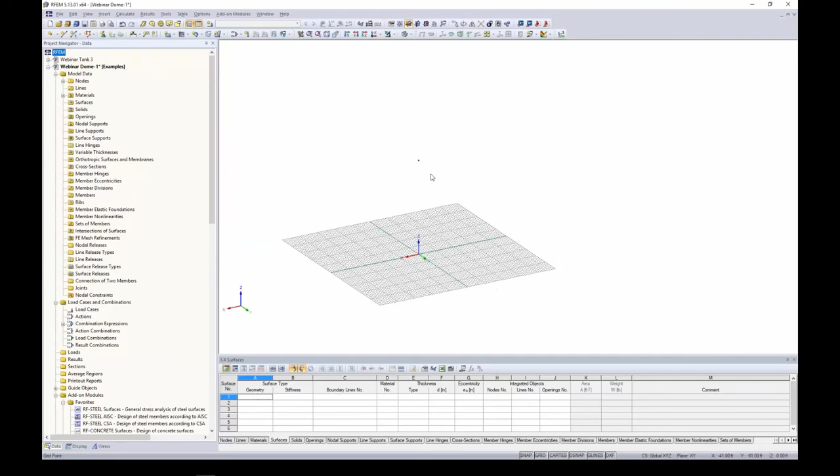So I'm going to move on to a line element. Now a line element is exactly what you would think it'd be, something similar to what you would use in AutoCAD. In addition to a straight line, we have many other features here that are similar to AutoCAD, such as circles, ellipses, polylines, arcs. For today we're going to utilize this option in arc where we define our radius.

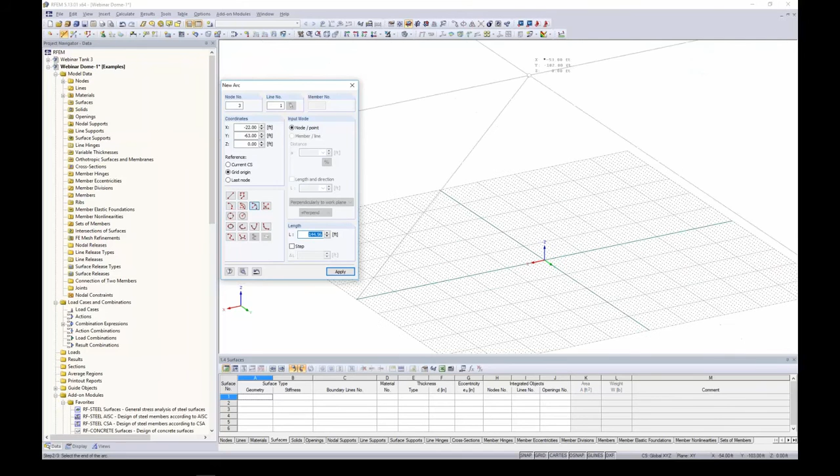So with this, I'm going to zoom in here, and I'm going to click on my first point 50 feet away from the origin and snap to that second node that we just created. So now you can see here that I can go ahead and either snap to a point to define the radius of my arc, or just type in 50 feet, hit enter, and now we have that arc element created.

I'm going to select this arc, and I'm going to use my rotate copy tool. I'm going to create 4 copies here with an angle of 90 degrees. Now we're going to rotate it about the origin, nothing too special here.

But there is a setting called Edit Expanded Settings, and we have the option within this dialog box to actually create surfaces between my copy nodes. So what happens with this checked? Well, once I click OK through all of these dialog boxes, you'll notice that my dome roof was created with just a few clicks of a button.

So the dome roof right now is bright red. That usually tells you that there's something that hasn't been defined within the model. So when I highlight all of my surface elements, I double click to edit them. We want to set the material, the thickness, and the stiffness here. Right now everything's set to null.

So we're going to change this to standard. We're going to utilize one of the default materials within the program, so concrete 4000 PSI. Now you can always access your material library here to change the material or to create one yourself. The thickness of our dome walls will be 8 inches, and I click OK.

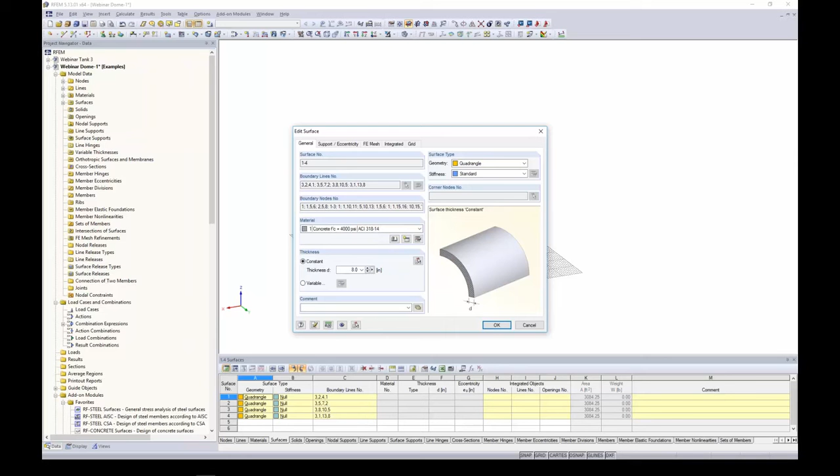So once I click out of here, you'll notice that the color is now gray, which is representative of our concrete material. So perhaps a weak point of a dome would be up here at the top, and we would want to add in some type of rib members for additional stiffness up at the top center point here.

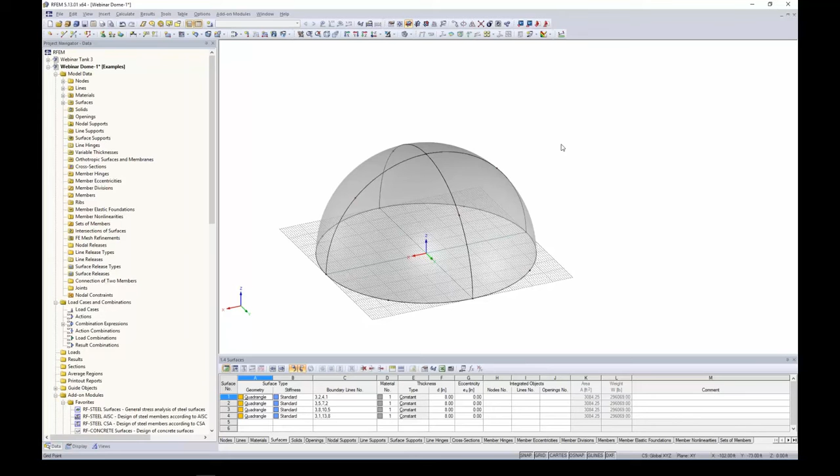So I want to show you some of the useful features and tools that we have within RFEM to quickly do this. Now I'm going to turn this into a wireframe view, turn off my grid down at the bottom, and my line elements up at the top, I'm going to use my selection box here.

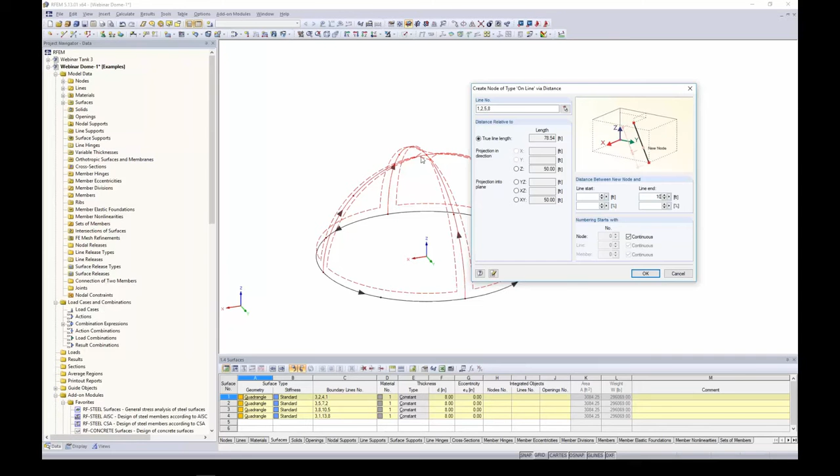I'm going to right click to edit the line. And under this option, we have create node on line at a certain distance. So with this option, I can create a node on that line 10 feet from the line end. And you'll notice these black arrows back within RFEM show me exactly where the line start and the line end is.

I click OK. So now I've done nothing more but just create little nodes here at the top of the dome. Now we're going to do the same thing at the bottom lines. I'm going to highlight all of these lines down at the bottom, right click, and under line we can create a node on the line at a certain distance, again 10 feet from the line end.

I do the same process again. This time I'm going to create the node on the line 10 feet from the line start. Okay, so all I've done here is add in these additional nodes to my structure.

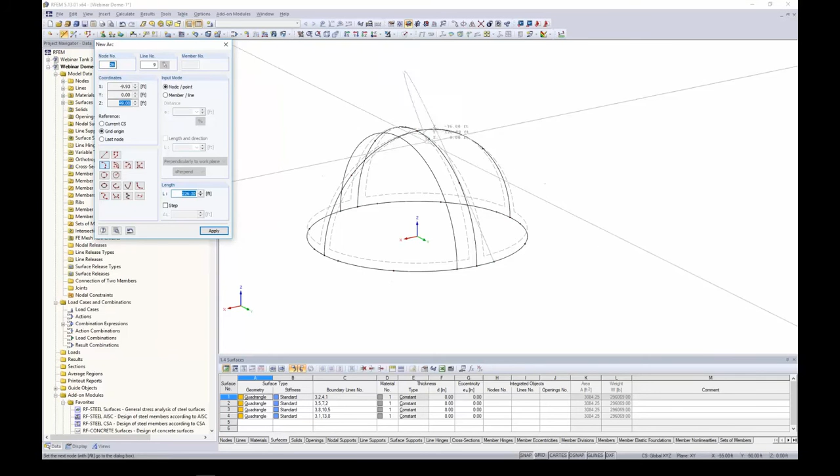Now I'm going to utilize the line element again. This time with my arc, I'm going to choose the option to define the arc with 3 nodes. Once I select this option, I can move this dialog box over and snap to these nodes that I just generated. Now you'll notice that I'm getting arc elements that match the curvature of my dome roof perfectly. There aren't any additional definitions that I need to define here in terms of the geometry, but the program will automatically do it for us.

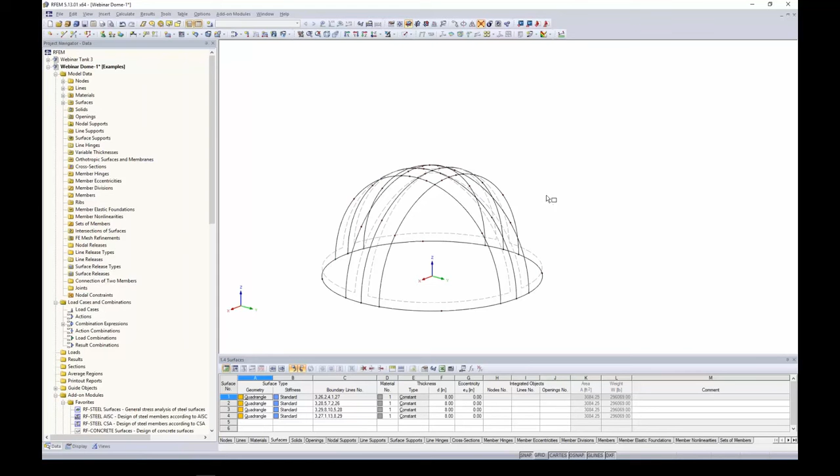Once I've done that, I'm going to use this tool at the top, Connect Lines or Members. This allows me to highlight the top of my structure, and now all lines that are intersecting will be divided. You'll notice that an additional node was created here at these intersections, so these are now separate line elements.

I'm going to select 2 of the arcs over here, 2 on the back side, and right click to reverse the line orientation. Now you'll notice when I select the other 4 arc lines that all 4 of these lines begin at the bottom of my dome structure and end at the top.

With this option, I'm going to right click and divide the line this time by a certain distance. So from the line end, I'm going to divide it at 10 feet. I click enter, and now you'll notice I have a couple smaller line segments here.

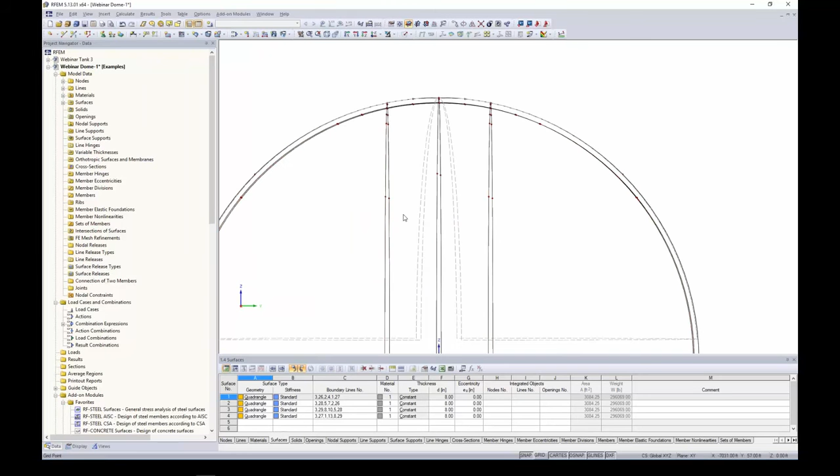Now we're ready to clean up the model a bit. So what I can do is turn this into elevation view, highlight some of these unnecessary lines, and simply hit delete on my keyboard. We're going to do so on the other side after I've rotated the structure around. So now you can see we have what will be rib members, but right now they're only lines.

Now, before assigning a cross-section to these lines, what I need to do is integrate these lines into each surface. When I take a look at the rendered view, typically RFEM will do a lot of this for us automatically, but this geometry is a little bit more complex, and we added these lines in after the fact.

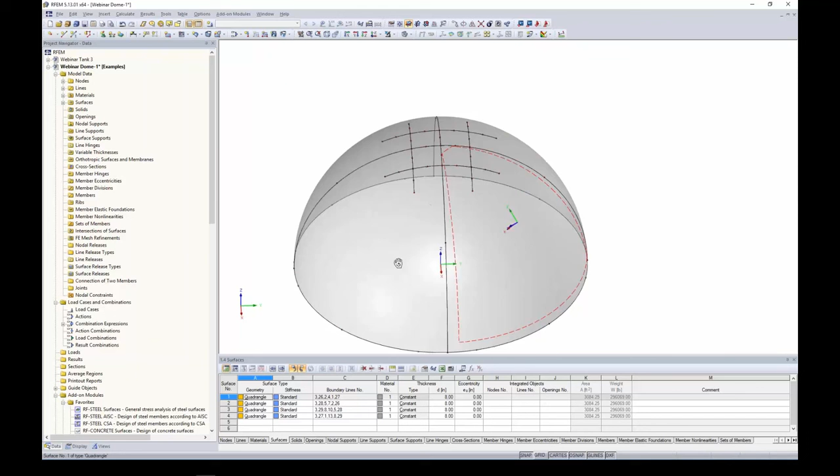So what I can do is double-click on this surface, and we have a nice tab here called Integrated. With Integrated, I can graphically select the lines, move this dialog box here, that I would like to integrate into that particular surface. I click OK, and then I'm going to rotate around and do the same thing for my second surface, select my 4 lines graphically, click OK.

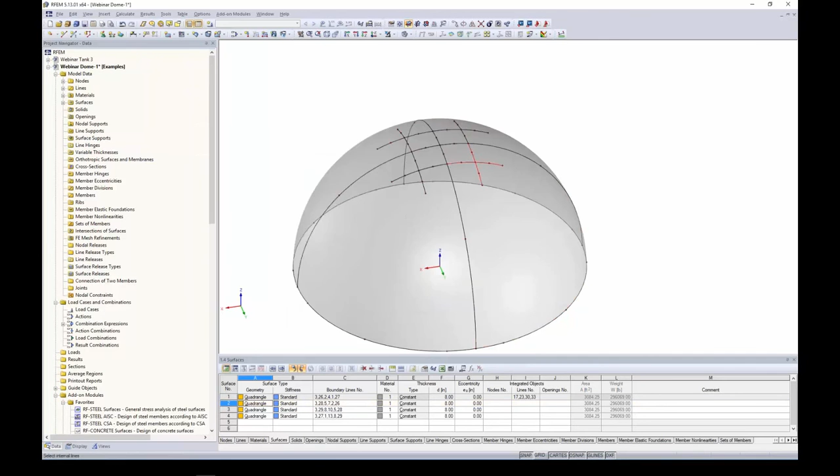We're going to do the same thing for the third surface, selecting the 4 lines, and lastly we have our 4th surface that we need to consider. Once we fully integrate these lines in here, the surface will recognize that these lines are fully part of this particular 2D element, and I click OK.

Turning this back into wireframe view, I'm going to zoom out and put this into plan view. I'm going to hold down my control key and select all of these line elements here. I'm going to go ahead and click on... oops, sorry, I lost that selection. Let's try that again. So I'm going to select these 4 line elements on each surface that we just integrated.

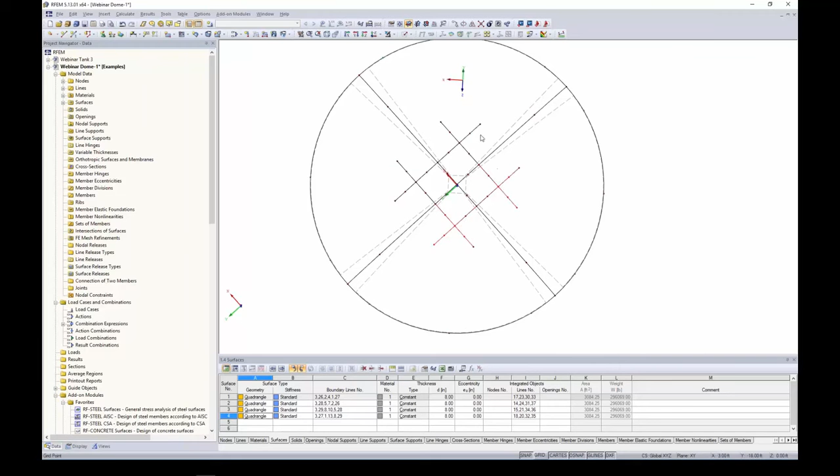And I'm going to right click on these lines to edit them. Now each member, such as a column, a beam, anything else, is comprised of a line element underneath it. All that we've done is assign a cross section to create that member for each line.

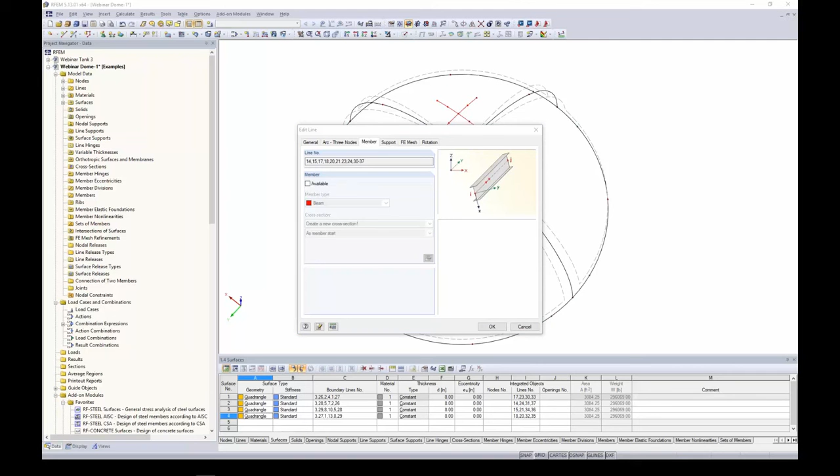So we have a member tab here. With this member tab, we can simply select that a cross section is available, and automatically a new member dialog box will pop up. Now the member type is going to be type rib. So what is so special about a rib element? Well, if I go into the detail settings here, you'll notice that a rib element can actually be placed below the surface. So the program will automatically determine which rib element should be dropped down below the thickness of that surface and do everything automatically.

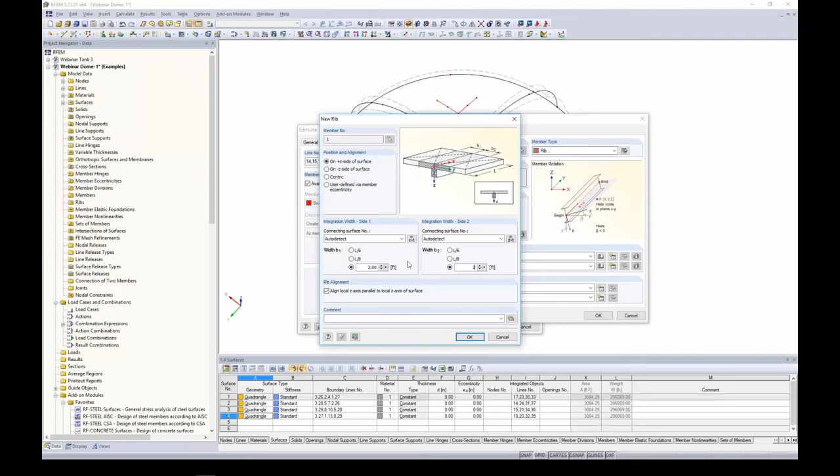Even further, we can define an effective width for the rib member on either the left or the right side. So that will be taken into account later on if we wanted to do reinforcement design for this rib in one of our add-on modules. I click OK. I do need to assign a cross-section.

So for this, I go into my cross-section library. We're focusing on concrete today, so here are all of my parametric massive sections. And in particular, we'll utilize this rectangle, and I just simply type in my geometric properties of 10 inches by 18 inches. F'c of 4000 is great. We will stick with that. I click OK through all of these dialog boxes.

Now in wireframe view, it doesn't look like anything happens, but if we turn this into a rendered view, well, now we can see these curved beam elements drop below the thickness of the surface, and everything was done automatically. So very powerful modeling features here in order to model those rib members.

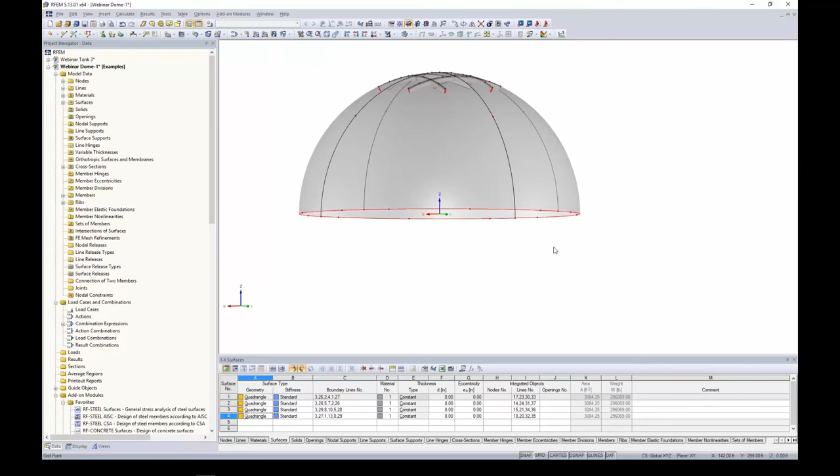So we're complete with the dome roof, and we want to move on to the lower wall. So for this, all I need to do is to highlight my line elements at the bottom. It's as easy as right-clicking on the line, extruding the line into a surface. So for this, I'm going to specify a wall height of 15 feet. The thickness of the wall is going to be 10 inches. In the global Z direction, I'm going to extrude these surfaces and then I assign my material to it. I click apply, and as easy as that, our walls are now modeled.

Moving on to supporting the structure. So for this, we have nodal supports, line supports, and surface supports. For the bottom of our walls, we want to apply a line support. So we have a couple default options here, either hinged or rigid. Now we can always create our new definition, which you'll notice we have the 6 degrees of freedom, both translation and rotation. We have partial fixity, so if you have something that's not fully fixed, not fully released, but somewhere in between, then you can specify a spring constant here.

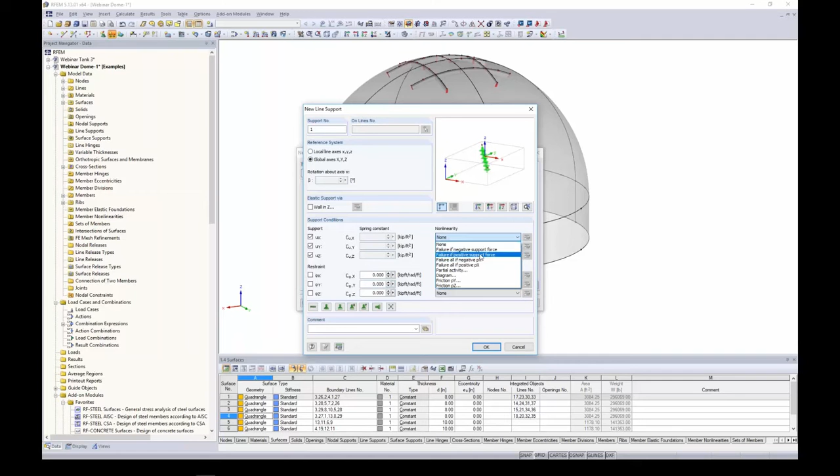And lastly, because RFEM is a nonlinear analysis program, we can take into account geometric nonlinearities with these wall supports, such as sliding, friction, partial activity, maybe we have a failure. All of that is possible within the program. As for today, we will stick with the default of fully rigid. I click OK, and I just simply highlight the bottom line elements of my walls. Now this fully fixed support would be applied at every FE mesh point at the bottom of the wall.

Okay, so now we are completely done with the geometry. There are a few considerations that I want to discuss before we move on to loading. Number one are our local axes of our surfaces. So for this, if we right-click to turn on the local axis system, you'll notice that my local axes are not all in the same direction, and this is a problem for 2 reasons. Number one, for loading considerations. If we were to apply loads according to the local axes, which we will do in just a minute, this can be a problem when we're trying to apply that load to multiple surfaces at once.

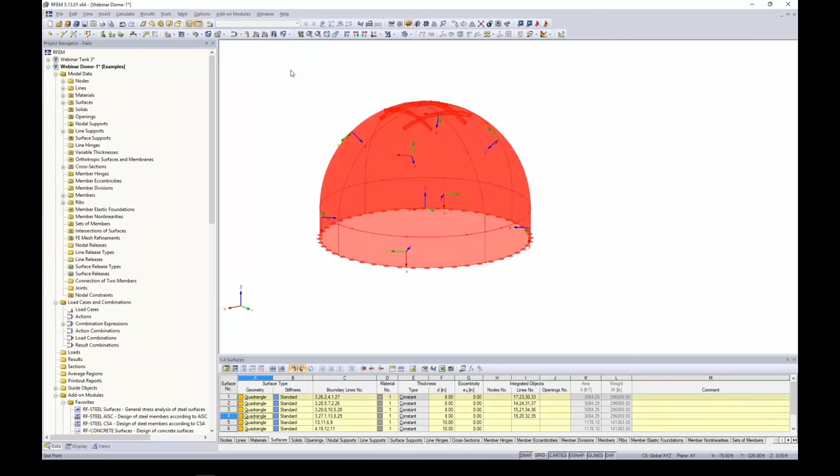Now the other and more important problem is our results. Our results will not be displayed graphically correctly if we do not orient these axes all in the same direction. Our results are going to be based on our local axes. So again, I'll mention this when we get to it, but point being that all of these local axes need to be facing in the same direction. Well, we have a nice feature within the program that all I need to do is to highlight this entire model. I right-click to edit my surface, and we have a tab called Axes here. This allows me to orient all of my axes at one time.

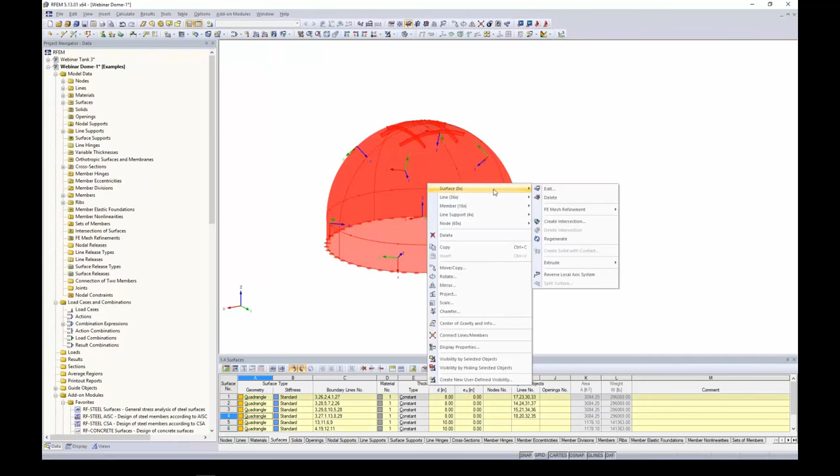So what I'd like to do actually before doing this is to take a look at the model. Now this line here, I'm going to right-click and I'm going to reverse the line orientation. So it's starting from the bottom and going up to the top. So now when I right-click to change the axes, I'm going to orient all of my local y-axes parallel to a line in the model. And I choose that line in the model, this one that I just reversed the orientation. So I click OK, and now you'll notice that all of my y-axes are facing in the vertical direction.

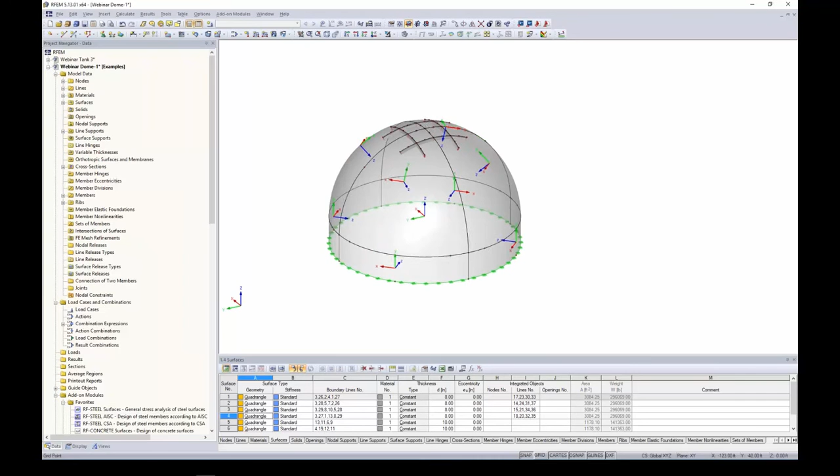Even the ones that have curvature up in our dome roof are facing directly towards the internal center point here. So that's one quick way that we can orient all those axes. So again, incredibly important. So let's turn off our local axis system and move on to I-crack factors.

Now the ACI specifies that we must apply I-crack factors to different components in order to modify the stiffness for our analysis for cracking considerations. So what we can do is once again highlight the entire model, we right click, and under surface edit, we have a modify stiffness tab. Now the default is always set to none. But when we use this drop down, you'll notice we have both ACI and CSA.

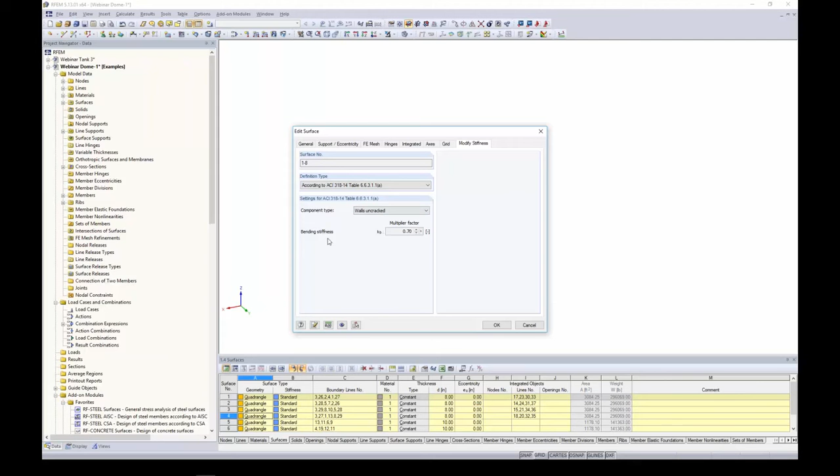When I take a look at the ACI, we have our different component types consisting of columns, walls, beams, flat plates, and flat slabs. When I choose walls uncracked, for example, well, this is the I-crack factor directly from the ACI code. Here's our reference that will be applied to this particular stiffness when we run our analysis. So I can click OK to modify the stiffness.

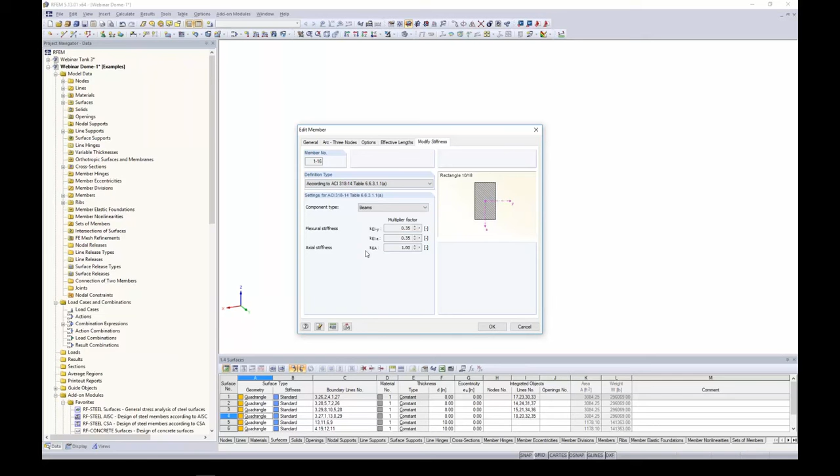Now, don't forget that we have these rib members up at the top that we need to do the same thing. When I right-click to edit the member, we also have a Modify Stiffness tab, and we can set the definition type according to the ACI. This time we will choose beams, and here's my I-crack factor that will apply to the stiffnesses for my analysis. And I click OK.

Now, the final consideration is our FE mesh. Under Calculate, Generate, or FE Mesh settings, you'll notice that these settings are set to 1 foot by default. Now, 1 foot is typically okay, but for a model this size, remember our diameter is 100 feet. Maybe we could go with something a little bit bigger.

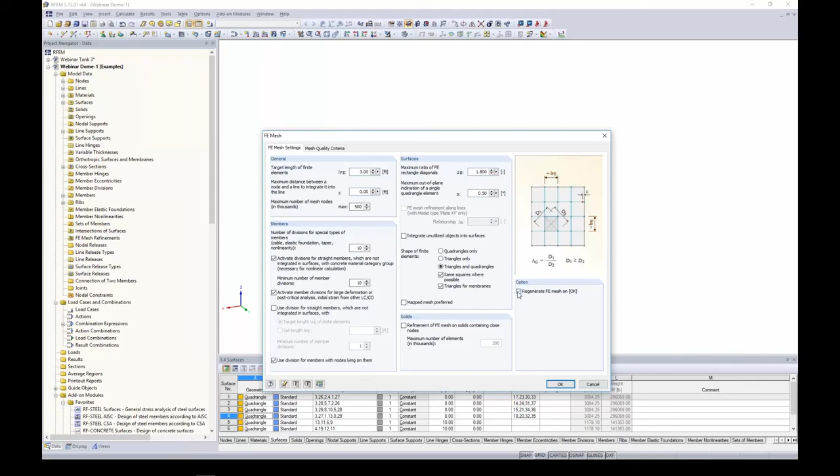Now, this is a very happy medium that you have to find as the user. If we set something too large for the FE mesh, then you're going to get inaccurate results. You set something too small, well, your results will certainly be accurate, but it may take you quite a while to solve your model. So for us today, I've determined that 3 feet is okay, and I can regenerate the FE mesh upon OK. And now you'll notice that my FE mesh is generated with the click of a button.

Everything is tied into the nodes, to the lines, to the members, to the supports. I don't have to do anything manually. We can even put in FE mesh refinements if we'd like to. Now, you don't even have to generate the FE mesh. This will automatically be done every time we go to run an analysis, but I just wanted to show you here what that FE mesh may look like.

Okay, we are now ready to move on to loading. So for this, I'm going to generate new load cases, and you can see this tool up here in the toolbar, which opens up our dialog box. Now for our first load case, we'll just call it dead, and we're going to assign the action category of dead here. Action categories are important so that the program knows which load factors according to the ASCE 7 to apply to which load cases. So for dead load, you'll notice self-weight is automatically checked here, so we will account for self-weight automatically.

Creating a second load case, we'll call this one live 1. The action category will be live. We can make a copy of this one. We'll rename it to live 2. Creating a fourth load case such as snow with the action category of snow, and lastly one for wind with the action category of wind. Now keep in mind for all these additional load cases, self-weight is unchecked here. We don't want to account for it twice, so it's only active in the dead load.

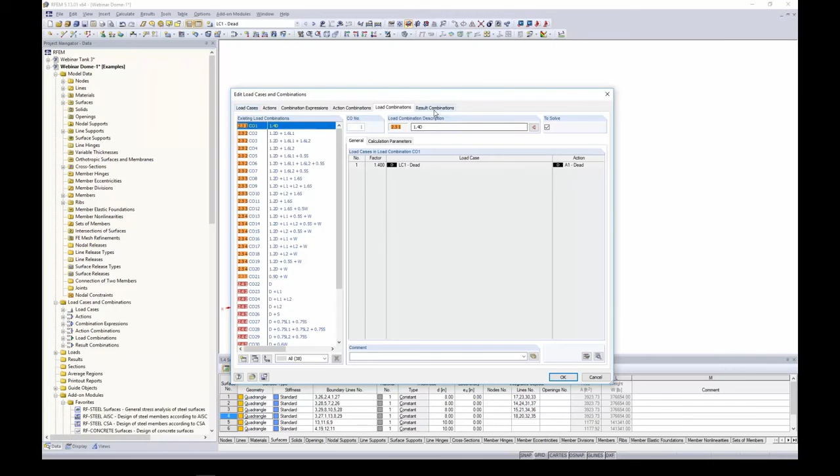The results combination is going to be nothing more than an envelope solution to show you the max and min results. So we have an envelope solution or result combination for all of our LRFD load combinations and one for our ASD load combinations.

So that's something to keep in mind when we look at our results later. So once I've defined my load cases and combinations, you'll notice they're now available within this drop-down box. What we want to do is to make sure that we have the load case selected here of what we want to apply our further load. Now for dead load, I'm going to assume that I only want to apply self-weight here. So we're going to forego any additional loads for dead weight for now.

I'm going to move on to live load. So for live load, we want to assume that this dome structure will be filled with some sort of material or fluid or whatever else inside, creating an outward pressure. For today, I'm going to assume that that outward pressure, that material, is only filled up to the top of my walls. So what we would like to do is to create a new surface load, and that is one of the other tools up here in the toolbar.

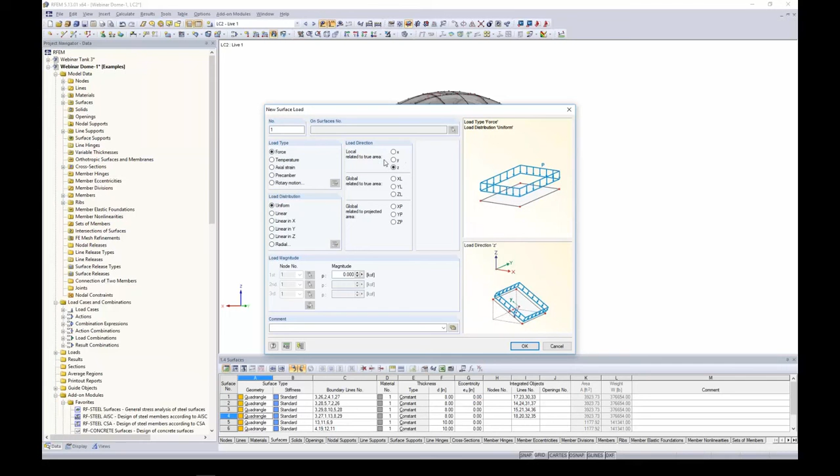So when I go to generate my new surface load, I am going to apply this in the local Z direction. Again, this is why local axes are very important to make sure they are all aligning. We're going to vary this linear in the Z direction. Now at the top of my wall, I want to have a magnitude of -2 kips per square foot. But at the bottom, I'd like to have -2.5 kips per square foot. So that's great. I've defined these two magnitudes, but I need to tell the program what is the top and what is the bottom of the wall.

So I can graphically select 2 points. Here's the top of the wall, here's the bottom of the wall. So now those nodes are associated with those particular magnitudes. I click OK, and now you'll see that all I need to do is to select the bottom of my walls, and now that outward pressure is displayed. It has increasing magnitude as we increase in the depth of our wall.

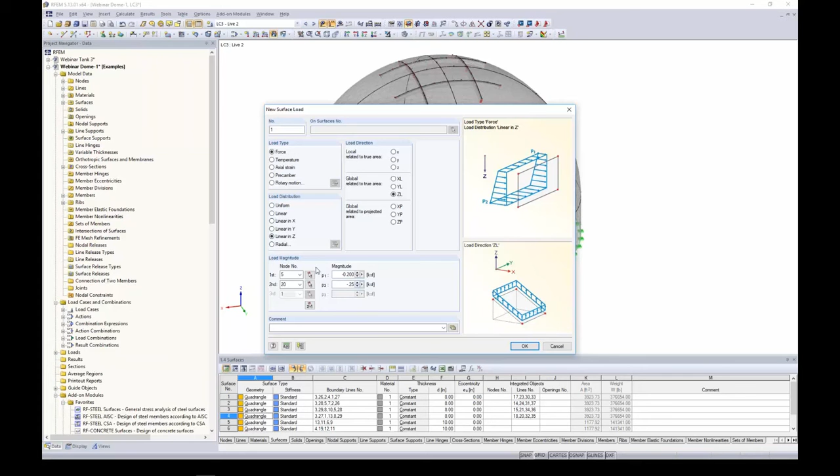For live load 2, same concept, but this time I would like it to be some type of friction load, only applied to the walls. So for this, we're going to go back to our surface load. This time we're going to apply it in the global Z direction. Now you could apply it in the local Y direction as well. It doesn't matter. This will vary linearly in the Z direction. The magnitude, though, will be negative 0.2 to negative 0.25, so much less. The settings are remembered from last time for what's the top of the wall versus what's the bottom. I click OK, and now you'll notice I just select my walls here, and here is my friction load applied to them.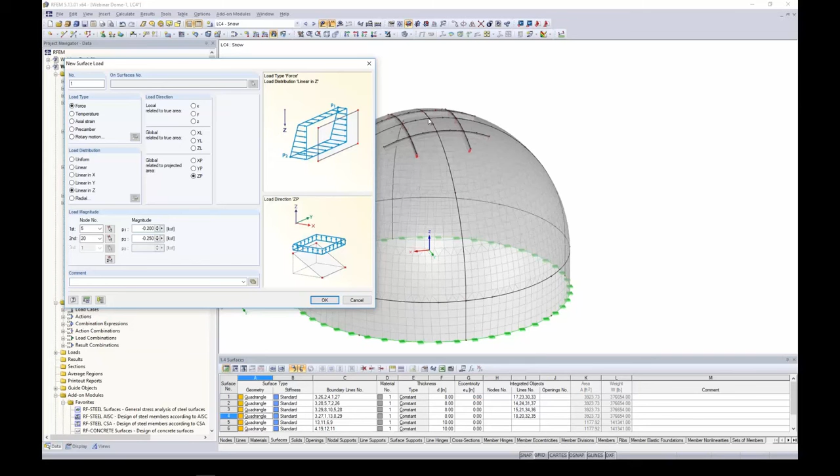For snow load, even simpler. I'm going to go back to my surface load once more. This time I'm going to apply it in the projected Z direction. So what does this mean? Well, at a point way out here on our dome roof, we're probably going to have very little snow load, if any. But at a point right here in the center where it's relatively flat, we want to see the full snow load. So with the projected load, it can take into account the different angles of our dome roof. I'm going to change this to a uniform load, and the magnitude will be negative 0.03 kips per square foot. I click OK. I highlight the top of my dome surfaces, and there is my snow load applied.

Moving on to wind load, and by far our most interesting load case. I am going to jump back to the PowerPoint for this to discuss a little bit about ASCE 7-2016 wind loads on domes. So within the standard, there is table 29.1-2. These are steps to determine the wind loads according to the main wind force resisting system for circular bins, silos, and tanks. This is incredibly user-friendly. It has all of the steps laid out for us on the assumptions that we need to make, the factors that we need to calculate, and ultimately to determine down here the wind force F or pressure P for both our walls and our roof.

Now, for the sake of time, unfortunately, I can't go through all of this today, but I did make some assumptions for my structure, such as risk category of 1. My basic wind speed was 103 miles per hour. We're assuming the structure is somewhere in Pennsylvania.

The exposure category is D, so maybe we don't have a lot of structure surrounding the area and we have these high winds. And I went ahead and calculated all of these factors to eventually determine that according to equation 29.4-1, which is referenced down here for my walls, here is the equation listed. Now, I moved my projected area to the other side of the equation. So what I wanted to see was my total pressure that needs to be applied to my wall. And what I came up with in my calculations is around 16 pounds per square foot. Now, that's the total pressure.

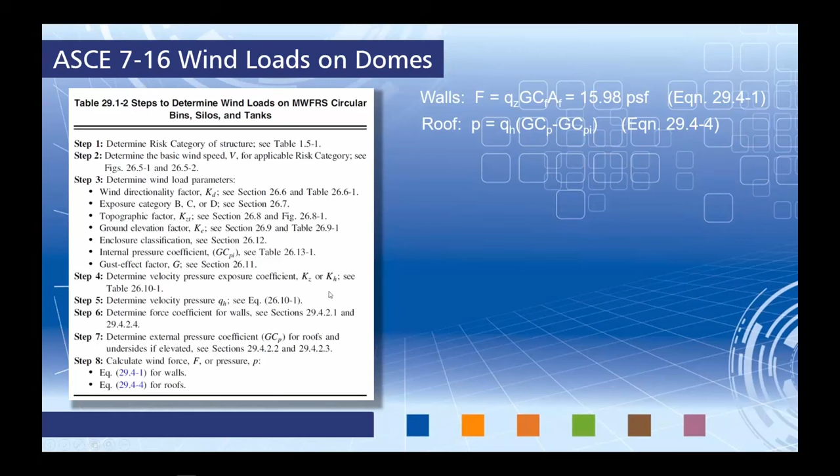The dome roof is a little bit more complicated. Again, this is referencing equation 29.4-4 from step 8 here. And this in turn references us to figure 27.3-2 for dome roofs. Now this is actually adopted from the Eurocode and was only available within the ASCE 7 within the last couple of releases. So dome roof loads, we need to first consider the wind direction, of course, and then we have some various points here where our magnitude will vary. We have points A, B, and C.

Now, the external pressure coefficients, the code allows us to interpolate, and all of these interpolations are based on the geometry of our dome. For example, the roof height, the wall height, the diameter, which we'll find the appropriate values here within this figure, and you can see my colored lines where I have interpolated based on our dome today. Now, eventually we get 2 load cases for A, B, and C pressure, as I mentioned, on the dome roof. And we get a second case for A, B, and C too with slightly different pressures.

Now, of course, we'd want to go through and maybe consider a different wind direction. If you have an asymmetrical structure, maybe we need to consider some torsional effects and so on. Again, for the sake of time, I'm only going to focus on this first case here and how we can apply it within RFEM. So jumping back to the model, the first thing we would like to focus on is the wind loads on the walls. I'm going to turn back on my drawing grid to assist me here, and I'm going to adjust the origin of the grid utilizing this button up here in my toolbar to move that to the front of the structure.

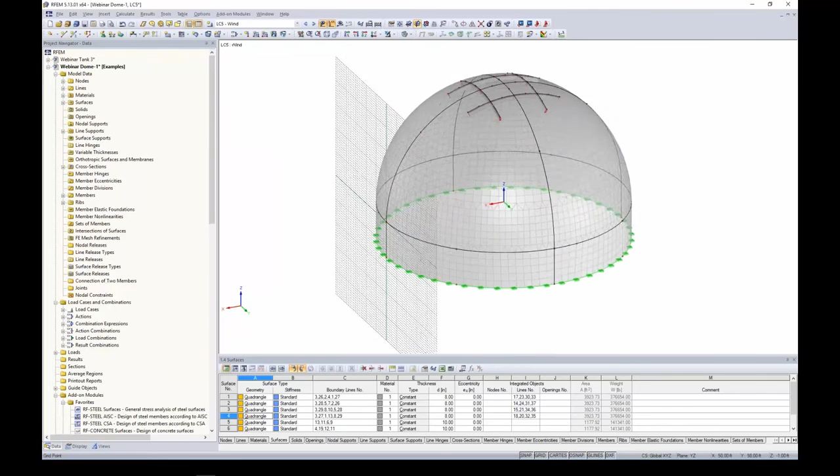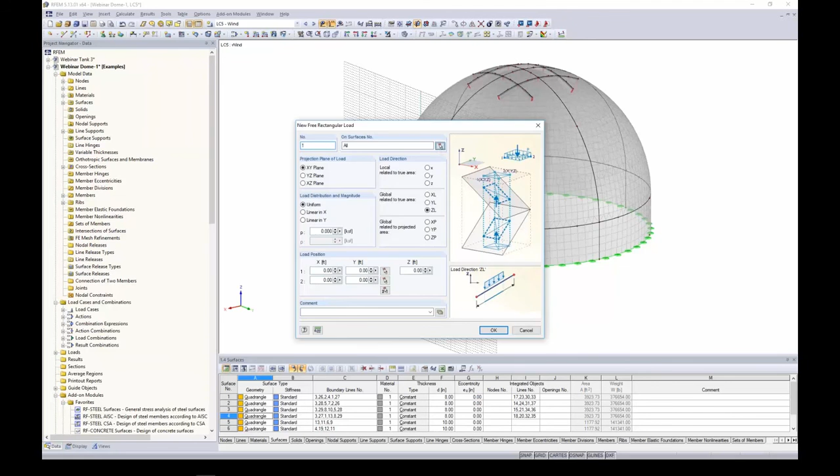So now, taking a look at the wind loads on the walls, I want to apply a free rectangular load. Now, a free rectangular load allows me to define a rectangular area, and all surfaces that fall within this rectangular area, well, this load will be applied to it. So you can see it's projected through that rectangular area to all surfaces within that box. So the first thing I want to do is to select my surfaces that this should apply to. Well, this only applies to my walls to begin with. I click OK. I do want to apply it in the YZ plane here, and I want it to be a uniform load.

What I'm going to do is I'm going to take that 16 PSF from the PowerPoint, I'm going to divide it in half. So 8 PSF on the front of the structure, 8 PSF on the back for a total force or pressure of 16 PSF. So negative 0.008 kips per square foot. And what I would like to do is apply it in the projected X direction. Now I need to define my load position. So for this, I just need to click 2 points here for my rectangle.

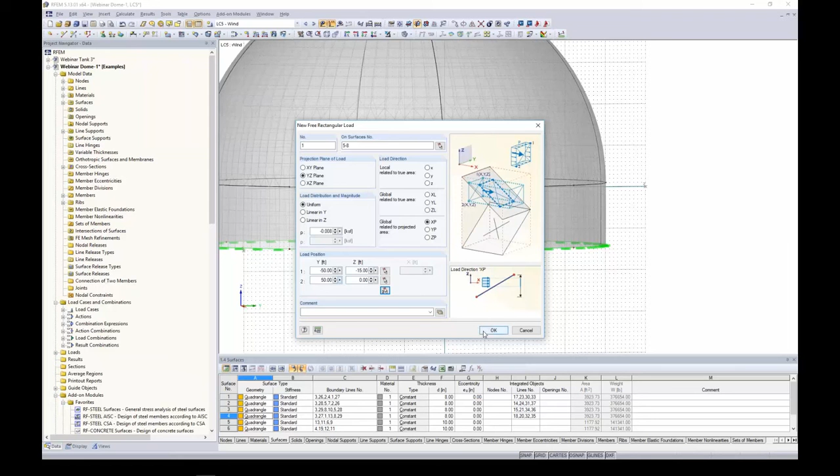So what I'm going to do is I'm going to turn this into elevation view. I'm going to snap down to the bottom of my walls, negative 15 feet. And then as far as the second point, I'm going up to the top of the wall. And just like that, my points are automatically shown here within the program. So this will make a little bit more sense once I click OK. Now we take a look at these wind loads. It is in the projected X direction only being applied to these walls. Now once we run an analysis, we'll show you the load distribution on the structure, which will make even more sense. But for now, we'll move on to our roof.

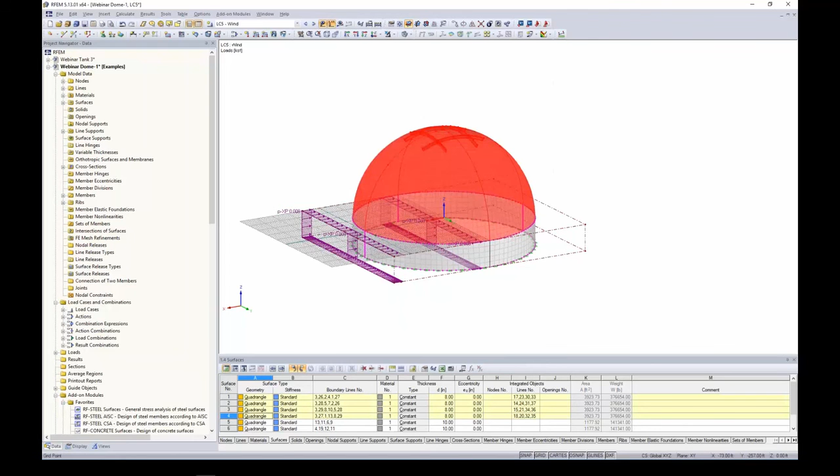So I'm going to select only my roof members here just to create an easier visibility by selected objects. And once again, I'm going to create a new free rectangular load. Now for this, I'm going to only apply this to the front 2 surfaces to begin with. I click OK.

And the plane is going to be in the XY plane. The direction is going to be in the local Z direction. Wind pressures are going to be applied normal to the surface here. It is going to vary linearly in the X direction.

Now remember from the PowerPoint, at the front of the structure, point A, this should be 0.016, so 16 pounds per square foot. At the top of the structure, point B here, we want this to be negative 0.041. This is suction load. So again, this was all taken from the ASCE 7 calculations that I had done from the PowerPoint. I'm going to select my load position again.

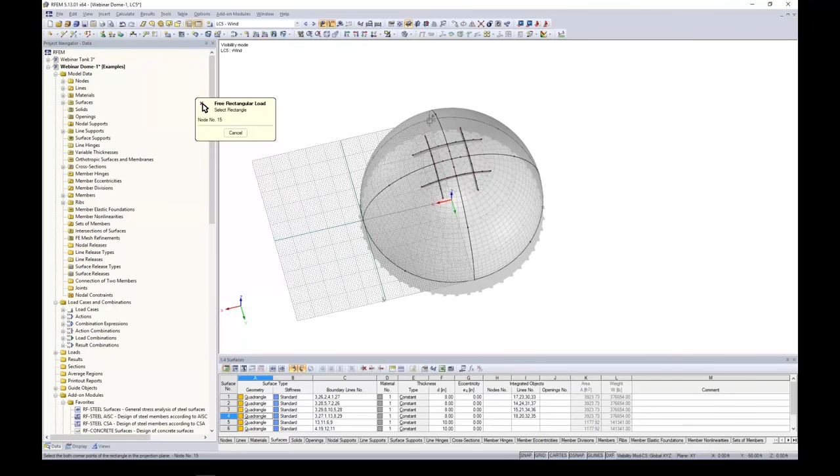This time we select a rectangular section here that encompasses those front 2 surfaces. So I actually will change this to 50 feet. We can manually change it here as well. I click OK. So now when I take a look at the pressures applied to the front 2 faces of my dome, here is my 16 PSF at the front. Here is my 41 PSF of suction up at the top, and it is displayed quite nicely.

Now as for the back of the structure, same exact concept, and a really easy tool to use is to highlight this rectangular load. Well, if I can select it. Okay, let's highlight this free rectangular load, and then I'm going to use my Move Copy tool. I'm going to create one copy, and I'm going to apply it in the negative 50 foot direction according to my global x-axis. Now I want to clear off the create surfaces between copied lines.

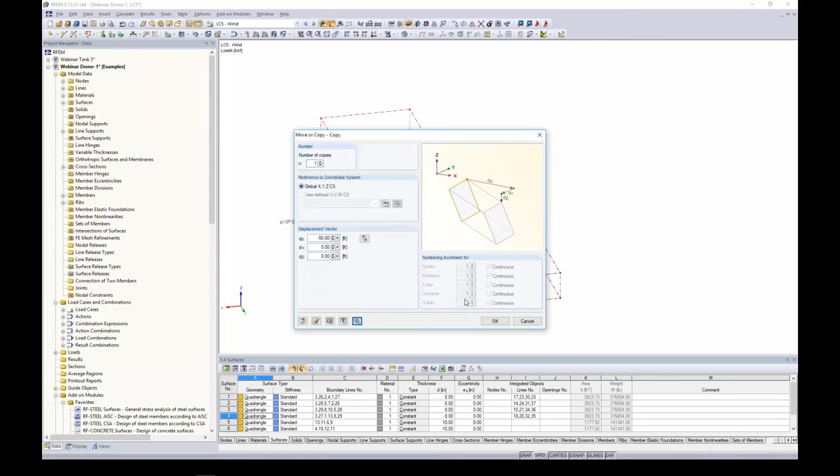So I click OK, and now that free rectangular load was applied to the back of the structure, but we need to make some modifications according to the pressure. So let me go back to creating a visibility by selected objects. I'm going to double click on this free load in the back. Now this is not applying to surfaces in the front, but rather only the 2 surfaces within the back. So I graphically select them, and I want to adjust the magnitude here. That's the only thing I need to do.

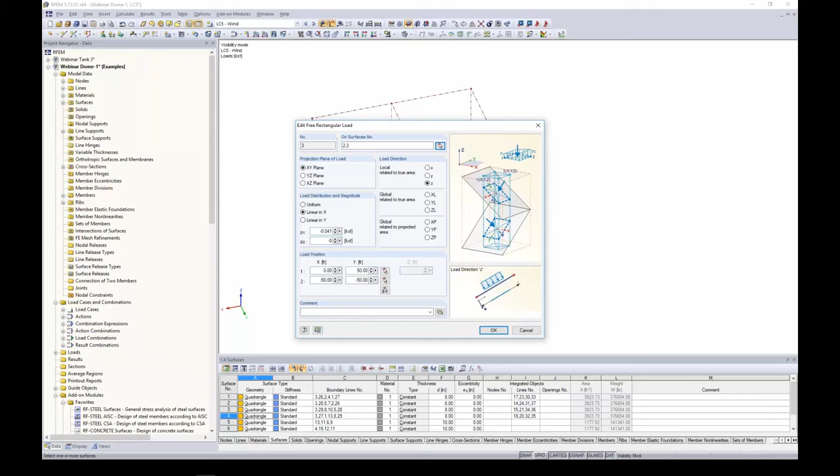So at the top, point B will be negative 0.041, and at the back side will be negative 0.011. And I click OK. So now my pressure is adjusted accordingly. Now this matches up perfectly to my points A, B, and C that I determined from the PowerPoint. So point being that we have so many features within RFEM that allow us to do these crazy wind loads on specialty structures, on not straightforward buildings, but rather curved domes and such, as you see here.

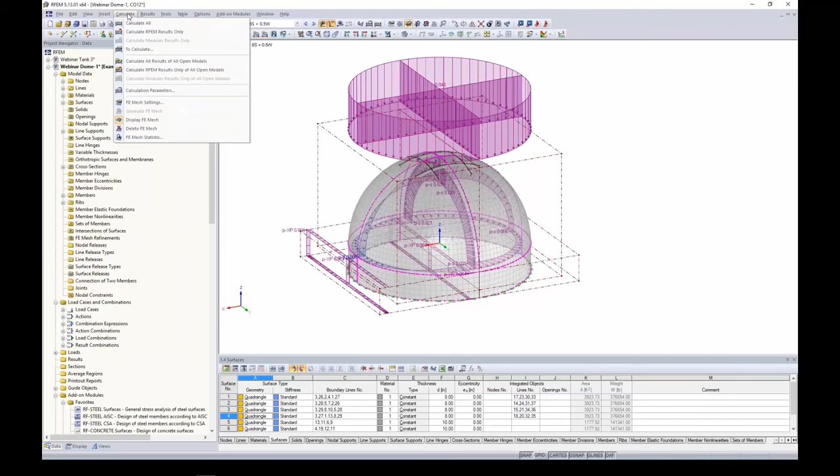Okay, so once we have completed all of our loading, maybe we want to scroll through some of these load combinations to take a look at all of them acting together. You'll notice here, for example, we have wind load, live load, snow load, dead load, all acting together. And now we're finally ready to run our calculation. So we can go to calculate, calculate all, and this does take a split second to run. So what I'm going to do is to go to an already saved model.

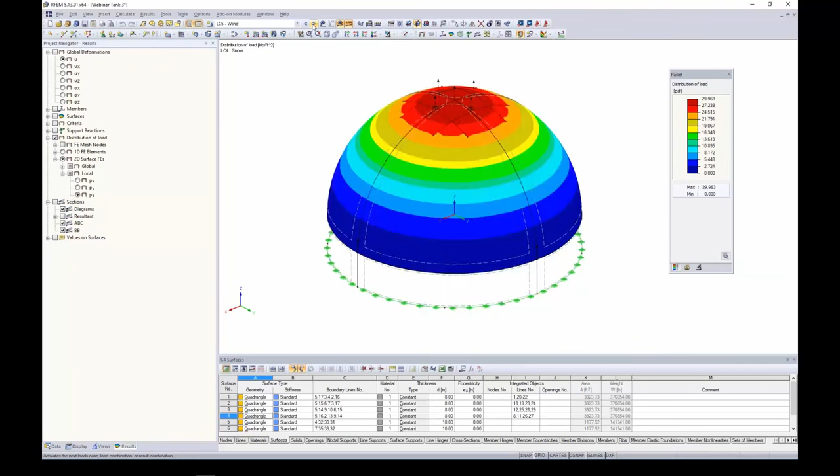And when we run our analysis, we're immediately presented with something that looks similar to this, showing us our global deformations. Now, here's the results available in our project navigator for the particular load case of snow. The thing I want to jump down to before getting into the analysis is the distribution of load. Now, in particular, I'm going to scroll to my wind load here, and I'm going to view it according to my 2D surface elements in the local Z direction. So creating a visibility only for my dome, I create that visibility.

Let's take a look at the distribution of the load. At the front, we have our 16 PSF. At the top, we have our 41 PSF, and at the back, we have approximately 11 PSF of suction for both the top and the back. Again, this just comes directly from our PowerPoint.

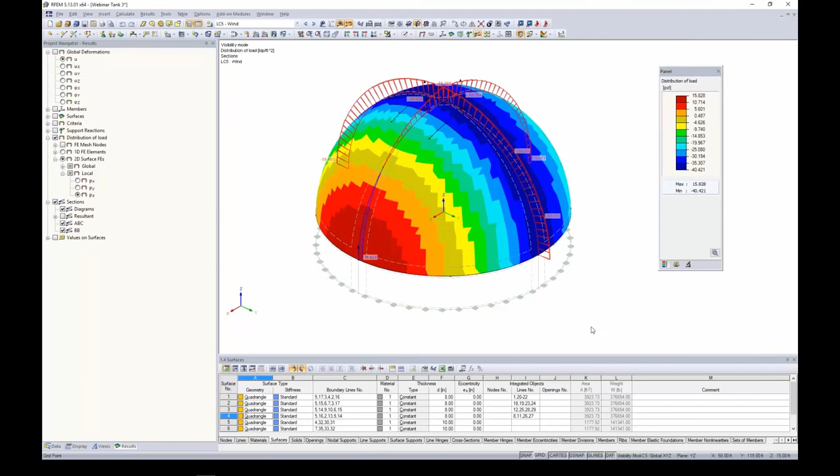So I've also gone ahead and added in some sections here. And these sections, which I can turn on, just simply make a cut right through the center of our model. So looking at our sections, we can see here that the 16 PSF, 40 or 41 approximately, and 11 PSF apply to the structure. Now when we rotate this to a point that is perpendicular to the wind load, we should see approximately the same magnitude everywhere. And that is what we see, approximately 40 pounds per square foot of suction.

Now the same goes for any point perpendicular to the wind load, so that is great for the distribution of load. Maybe we want to move on to the rest of the structure here. What we're first presented with is our deformations, and we can scroll through our various load cases and combinations. You'll notice these sections are still applicable for any results we're looking at, so that just makes cutting the view easier.

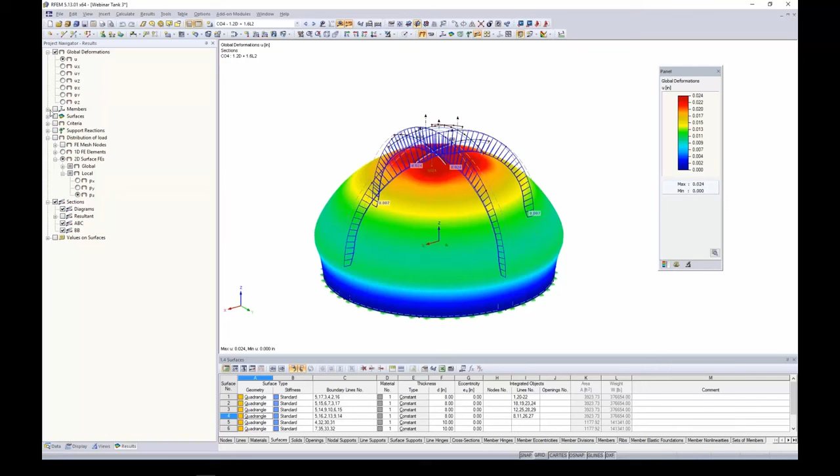Now remember we have our members up at the top too, so turning off my sections, we have these internal forces for our members - axial loads, shear forces, moments. We can take these internal forces into our own in-house tools if we wanted to do further reinforcement design. Now for today, we are focusing on our surfaces.

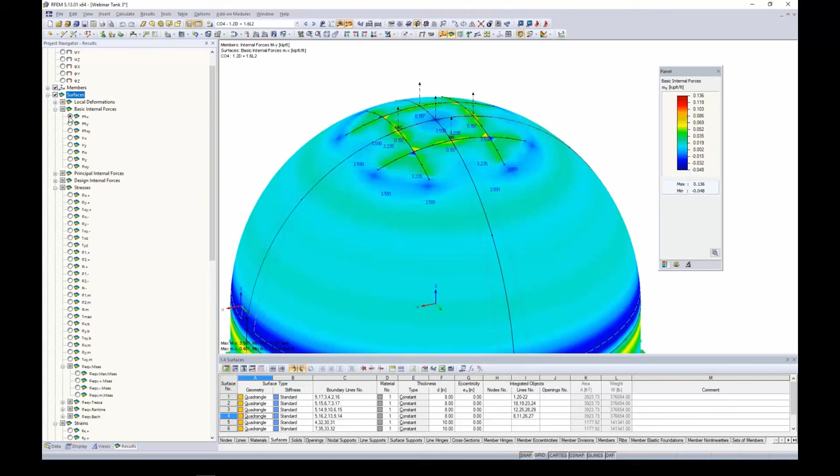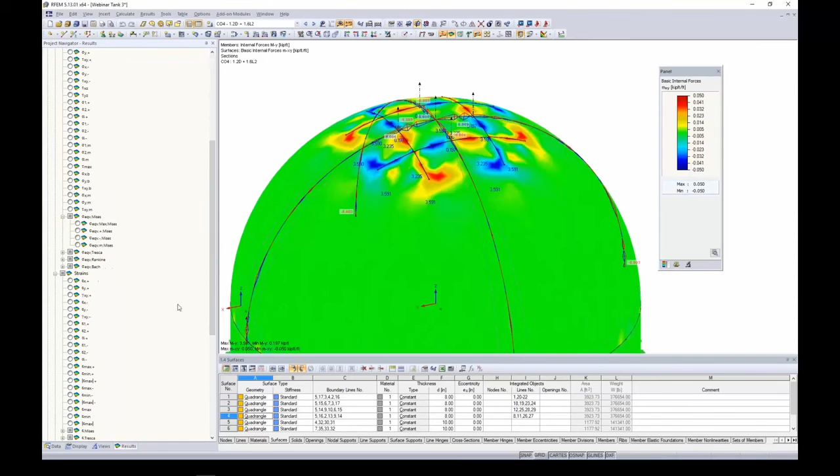With our surfaces, you can see all of the information available here, such as MX, MY. Again, we can turn back on these sections to view a cut through those. Keep in mind, these results are based on the surface's local axes - again, why it is so important to make sure all of your surfaces are oriented in the same direction. We can view stresses, we can view strains, all graphically here. So that's pretty much a summary of what RFEM is comprised of for the analysis portion.

Now for us today, we want to move on to design utilizing the add-on modules. So for this, I'm going to jump back to my other model here that we're working on, and I am going to launch RF Concrete Surfaces.

The add-on module is nothing more than a dialog box. All of our loading, load cases, combinations, materials, thicknesses - everything is brought in from RFEM into this add-on module. The only thing I have to do is specify some information that is relevant for design, reinforcement design per the ACI. You can see here we have both the ACI and the CSA available. We'll choose ACI for today.

Now for the strength limit state, I'm going to choose all of my LRFD load combinations selected for design. For serviceability, I'm going to select all of my ASD load combinations selected for design. Here is my first case. What we could do is go to File, Rename Case. We could call this one Strength and Service, just to be clear on what we're designing for here, and then I simply move down my list.

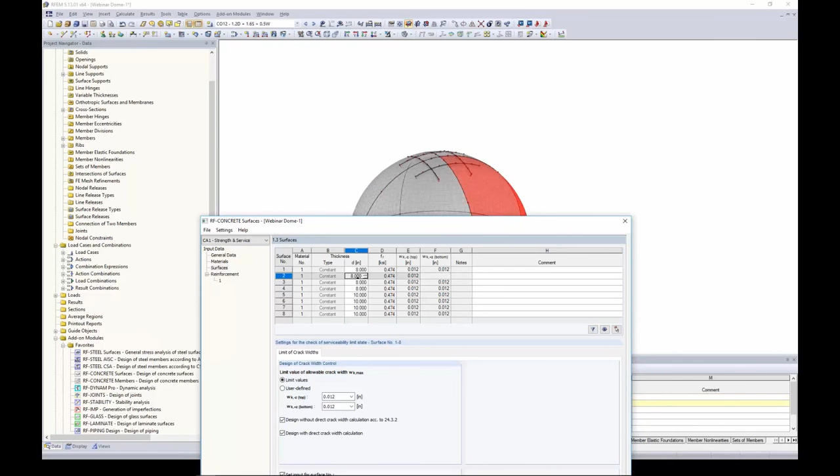Materials are brought in from RFEM - for both concrete, reinforcing steel is set here as well. Now you can use this dropdown to make adjustments you would like. You'll see the material properties are also listed here. Surfaces - again, all of the surfaces are listed. Everything is synced up to RFEM in the background, so as I'm clicking through these tables, you'll notice it's highlighted in the background exactly which surface I'm looking at.

Now, something to note for serviceability design: we can design for crack width. This option is only available because I had defined these serviceability load combinations. For crack widths, we want to first give the program a limiting value. The first option, limit values, has a drop-down box which comes from the ACI committee. They gave us some allowable crack widths based on the exposure conditions of our structure. We'll assume today that the structure is in a very humid environment, so our allowable crack width is 0.012 inches for both the top and the bottom. You can also use a user-defined option to type that in manually.

We have two different checkboxes here: design without direct crack width calculation according to Chapter 24. The ACI doesn't necessarily have limiting crack width values - what it does have is requirements for reinforcement spacing to make sure we don't have any cracking issues. So with this checkbox checked, we will double check the spacing of the reinforcement to make sure we're meeting all of those minimums or maximums. The other option is design according to direct crack width calculation. This will apply a theoretical calculation - it's the Gergely-Lutz equation. We will calculate a crack width based on the applied loads for our structure, then compare that to the limiting value here to eventually get a serviceability design ratio.

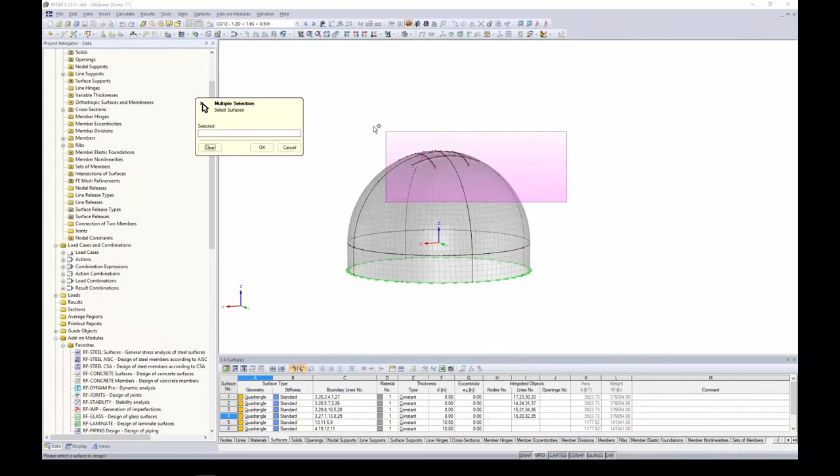I click OK, so it's surfaces 1 through 4. Now we have some reinforcement minimums here. You can change these as you see fit for your particular project, in particular maximum reinforcement percentage. This allows us to avoid brittle flexural behavior. The default is set at 9%, but you can adjust that as you see fit.

The reinforcement layout, this is where we define our concrete cover. It can either be measured from the centroid of reinforcement or to the edge of reinforcement. For today, I'm going to specify this as 2 inches in both directions for both my basic reinforcement and my additional reinforcement top and bottom.

The longitudinal reinforcement, so for this is my provided basic reinforcement. For my dome, I'm going to make the assumption that number 6s at 12s is going to be perfectly adequate based on these applied loads. So what I'm going to do is to utilize this nice tool that we have here.

Now, assuming number 6 is at 12 inches, my diameter is 0.75 inches, and my spacing is 12. So when I click OK after applying it to both the top and bottom and both directions, my reinforcement area is automatically calculated here along with my diameter.

This second option, additional reinforcement for serviceability state design, well, there's 3 options here. And the 3 options are laid out a little bit better in this little info button. So with this info button, we can see that the first 2 options will increase my longitudinal reinforcement as the program sees required. Instead, I'm going to choose this third option down here.

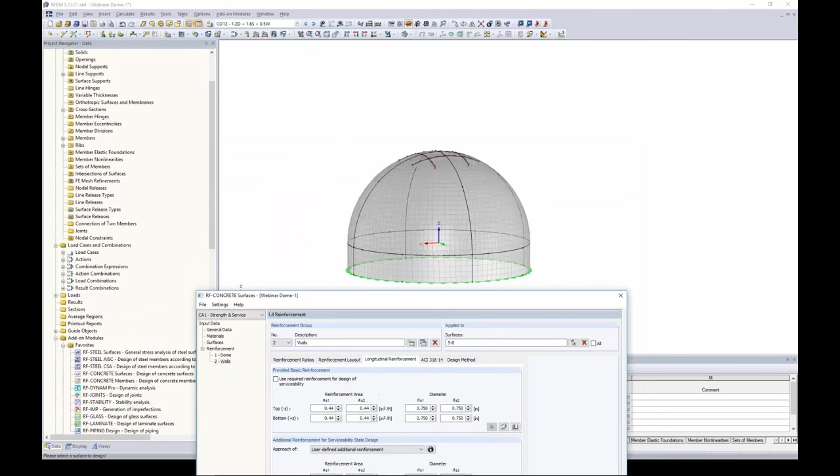So essentially we are done with the reinforcement provisions for our domes. Now what I would like to do is to simply make a copy of this reinforcement group. I make that copy and I call this one walls. So now you can see both reinforcement groups are available over on the left, or I can use my drop down available here. The program automatically assumes that surfaces 5 through 8 should be applied here. That's correct, but I can also graphically select them as well.

The only thing that I'd like to do different is instead of number 6s at 12s, I know I need an increased reinforcement here. So instead, I am going to choose number 7s at 8. My diameter for number 7s is 0.875 inches and my spacing is 8 inches applied to the top and bottom in both directions. I click OK and now you'll see that increased reinforcement area listed here. Absolutely everything else is unchanged from what I just set it to because I made a copy of that reinforcement group for my dome. So now we're ready to run our calculation.

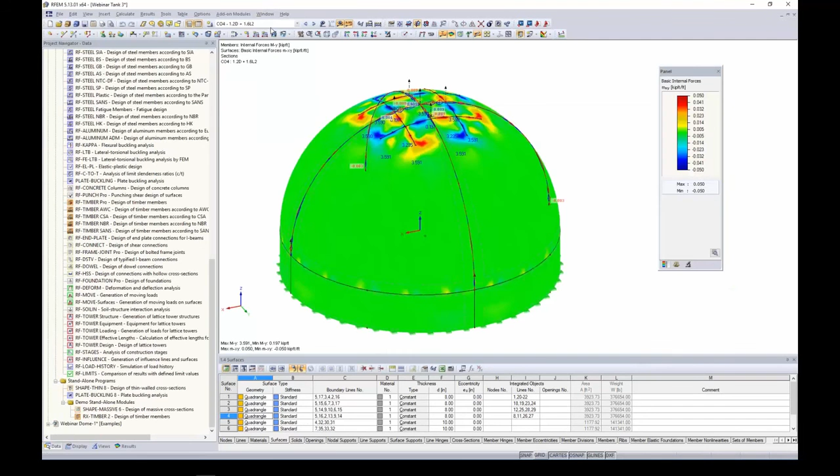Now, these tables are nice. Keep in mind that they are all synced up to the background within RFEM as we scroll through them, so you can see exactly where the controlling internal force is. But let's actually jump to the graphics view. We're still technically in the add-on module, you can see this from the drop-down box here in our panel, but we're viewing the results back in RFEM.

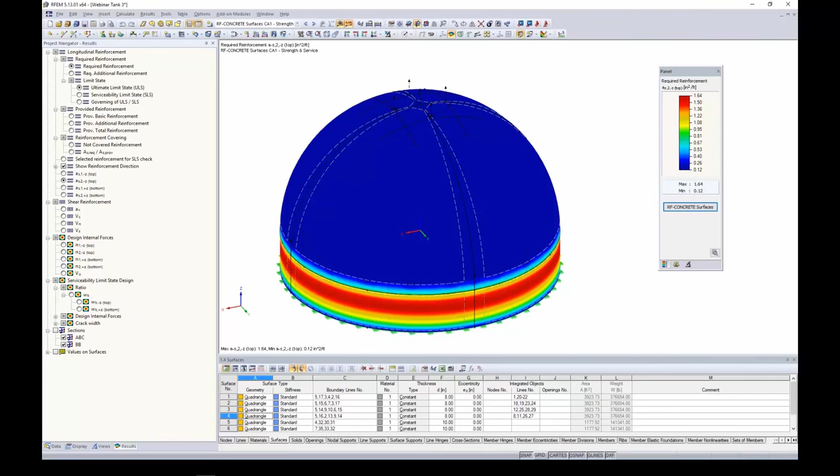So what I want to show you is, number 1, the required reinforcement. This is what the program has determined that it needs based on the applied loads. Here are my 4 different longitudinal reinforcements. You can see here I have both top and bottom in one direction and top and bottom in the second direction. If we zoom in, we can see the reinforcement layout direction graphically displayed as well.

So what I went ahead and did is, back in the add-on module, I went to File, Copy Case. And when I copied the case, I created a different name for it. All of my settings were remembered from my first case. The only thing that I did was jump to my longitudinal reinforcement and increase my area here. For my dome, I'm now looking at number 7s at 8 inches. That's all I've done is increase the area. For my walls, I've increased the area to number 10s at 8 inches, so significantly more reinforcement.

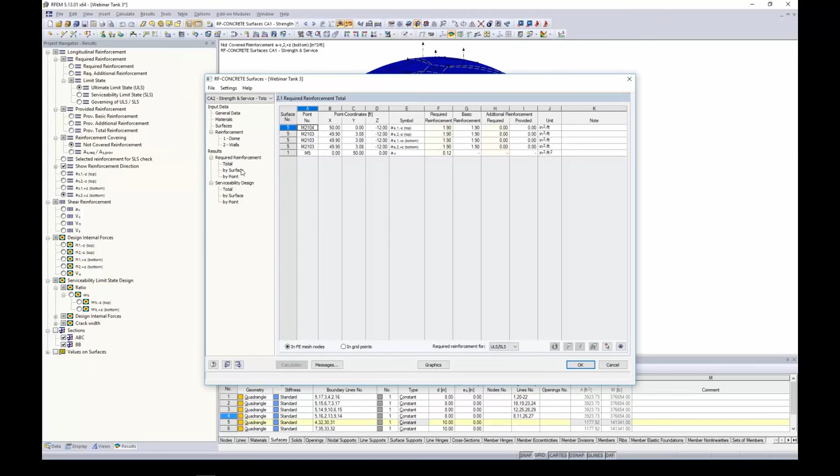Now, once I run my calculation, I'm immediately brought into my results table here. So now we can see that this additional required reinforcement is all 0. That tells me that the program has met the necessary reinforcement requirements just based on what I put in there.

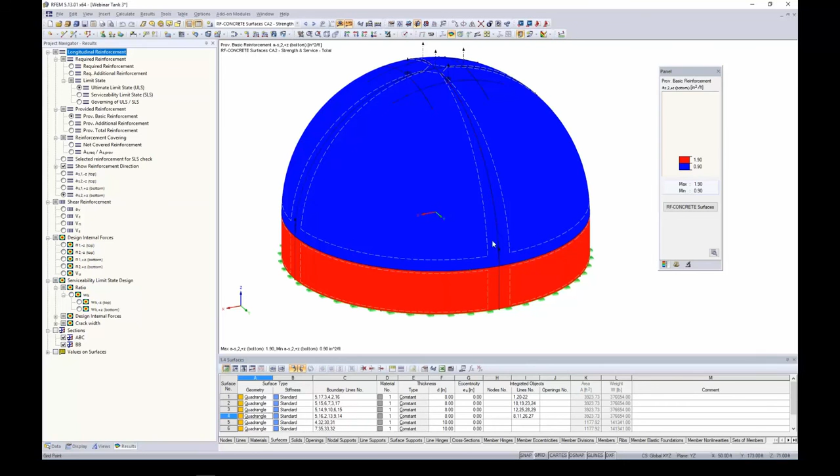If I jump back to my graphics view, required reinforcement is still the same. Nothing has been altered here because I haven't adjusted any of my applied loads or the structure itself. And as far as the provided basic reinforcement, this is now increased. So when I look at my not covered reinforcement, this is any reinforcement that is still required, you'll notice that everything is zeroed out. That means that my provided reinforcement is adequate for this design.

So that's how we can add the reinforcement to the surfaces individually. What I would like to show you now is that ideally, especially for a structure this big, or any structure in general, we're probably going to optimize the reinforcement, meaning we're going to put more reinforcement where it's needed and less where maybe we don't need as high of reinforcement. So how can we manually define where to put these different reinforcement areas?

Well, for this, I'm going to jump back to my webinar that I was currently working on, and we're going to launch the RF-CONCRETE Surfaces module. I'm going to go to File, New Case, or sorry, Copy Case. And this one we will call Strength and Service Manual because I'm going to manually apply those reinforcement areas. I click OK. So once again, nothing has changed here because I made a copy of that case, so really beneficial not having to re-enter all that information. The difference here is I'm going to launch this Details tab.

So under the Details, we have two options here, to automatically arrange our reinforcement or to manually define it. And this is where I'm going to choose the option Manual Definition. I'm going to click OK. Now you'll notice that this dialog box looks slightly different. This is the only part that is affected in the module by changing that to manually.

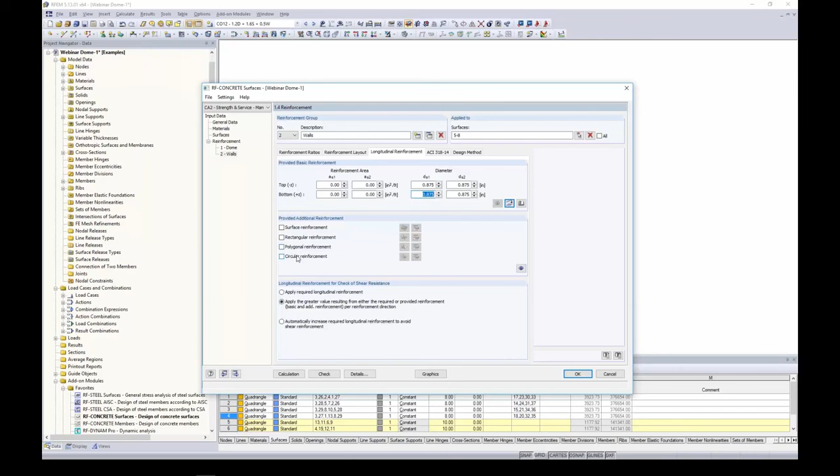For a rectangular area, again, this is going to be a rectangular area projected through several surfaces. A polygonal area, which is what we'll be utilizing today, or a circular reinforcement area. Circular might be incredibly beneficial for the top of our dome here if we wanted a different reinforcement in a circular fashion. So really any shape is possible.

Utilizing the polygonal reinforcement, what I'd like to do is to launch this dialog box. So for this option, I want to apply this in the YZ plane. And you'll notice that this is applied to surfaces 5 through 8, which is pulled directly from my walls. I can always adjust this if I'd like to do so. I'm going to apply as top, bottom, and my first direction. The rebar for the top of my walls, I want this to be number 10s, 1.27 diameter, at 8 inches.

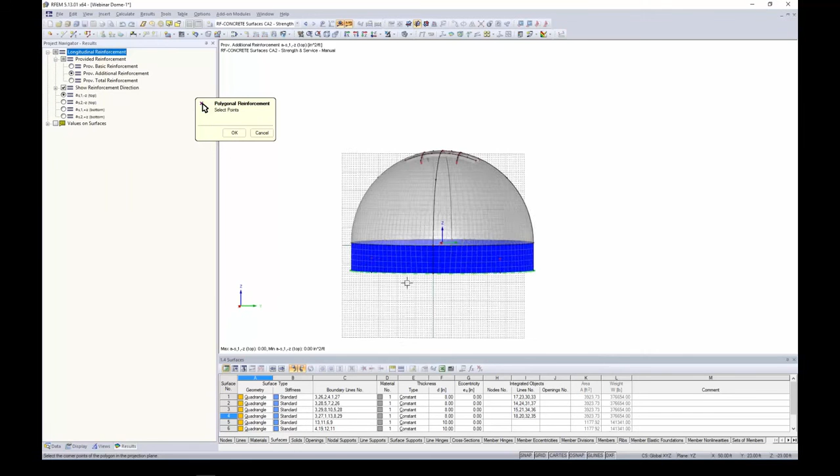Now, this will typically be blank when you first pull up this dialog box, and I now need to define the reinforcement position. And this dialog box looks pretty similar to a rectangular free load, so same kind of concept here. I'm going to graphically choose now, and I'm going to turn back on my grid. I'm going to rotate the model, and I'm going to snap to the points in elevation view where I want these number 10s at 8 inches to apply.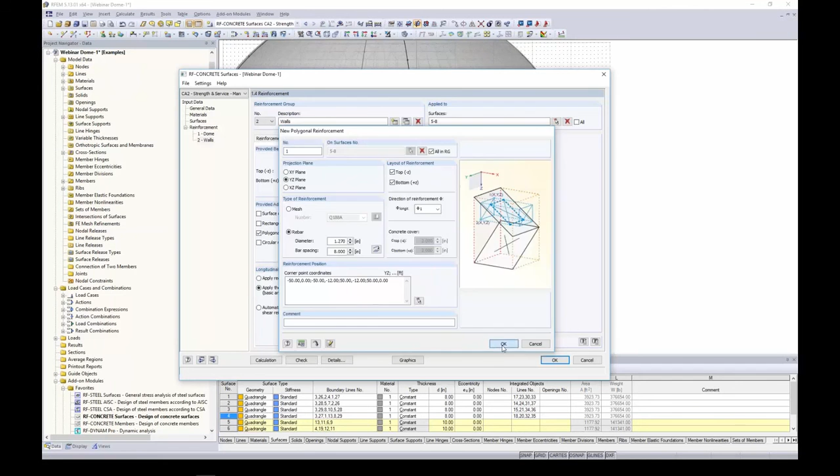So I'm going to move to the top of the wall all the way down to a point about 3 feet from the bottom of the wall. Moving to the other side, a point 3 feet from the bottom of the wall up to the top of the wall. Now once I click those 4 points, I right click to get back into this dialog box and I click OK. Opening up this same dialog box, all of my settings that I just put in are remembered. The only thing I'm going to do is change a direction and click OK.

So now when I take a look at this table, you'll notice that I have my number 10s at 8 inches applied to both the top and bottom in both directions at these particular nodes. So they're projecting through my surfaces 5 through 8. So I click OK. Well, what about the bottom of the wall? Well, this is where I want to come in. And again, most of these settings remain unchanged. I go back to my direction 1.

I want to decrease to number 9s. Maybe I don't need number 10s, but I want to decrease this to number 9s. So we'll choose a diameter of 1.128 at 8 inches. Now for this, I want to clear out this selection here, and I'm going to graphically choose the bottom 3 feet of my wall.

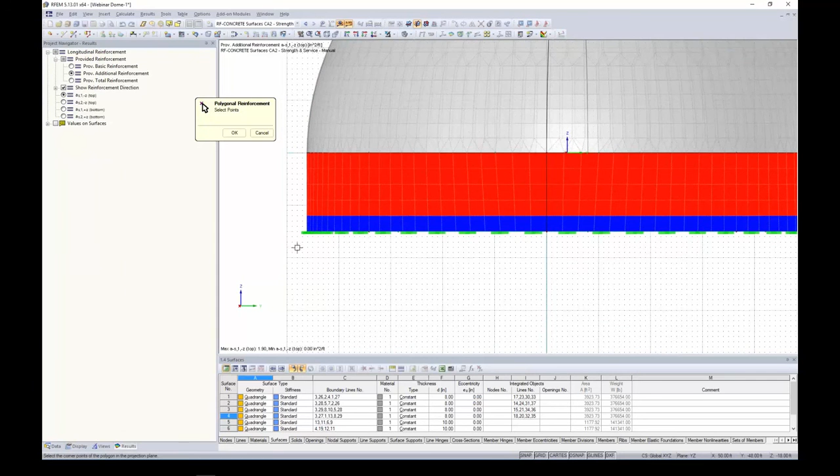So what I can do is just to turn this into elevation view, snap to a point at the bottom, snap to a point 3 feet from the bottom, move over to the other side 3 feet from the bottom and down to the bottom of the wall. I right click and my points are automatically populated here.

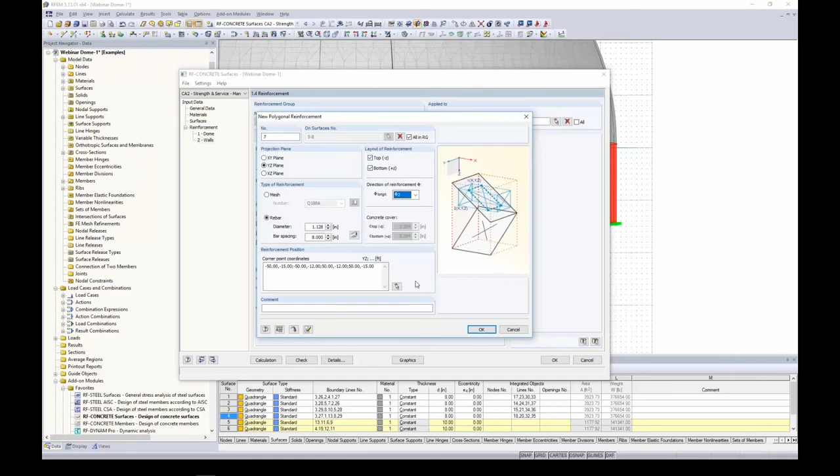Now I click OK. I open up that dialog box to change my reinforcement direction in the other direction here. I click OK, and now when I look at this table, I now have the bottom 3 feet of the wall with slightly less reinforcement. Now this table is nice, but it might be beneficial to see this graphically of how it's applied to our surfaces, so that's what this little eyeball allows us to do here.

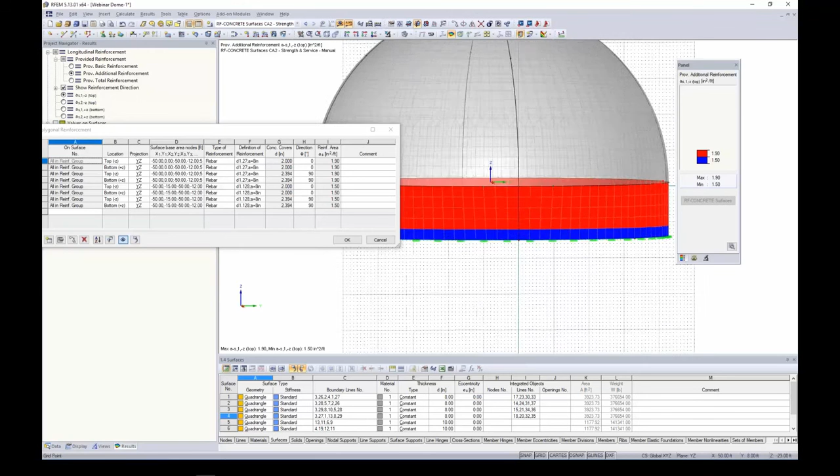When we click on this, we are brought directly into RFEM, still with this table being displayed here. Maybe I turn on my color panel here. Well, now I can see that for the top of my wall, 1.9 inches squared per foot is applied, but at the bottom, I only have 1.5 inches squared per foot. And the same goes for all the way around the structure. So pretty beneficial for viewing visually what we're applying.

So now that we are done with the reinforcement, I'm ready once again to run my calculation. So once again, jumping to my saved model, I would like to take a look at the results. So we are immediately brought into our required reinforcement here. And you'll notice that the required reinforcement is listed based on the analysis. Again, nothing should be changed with that. The basic reinforcement is also listed as well as additional required reinforcement and so forth.

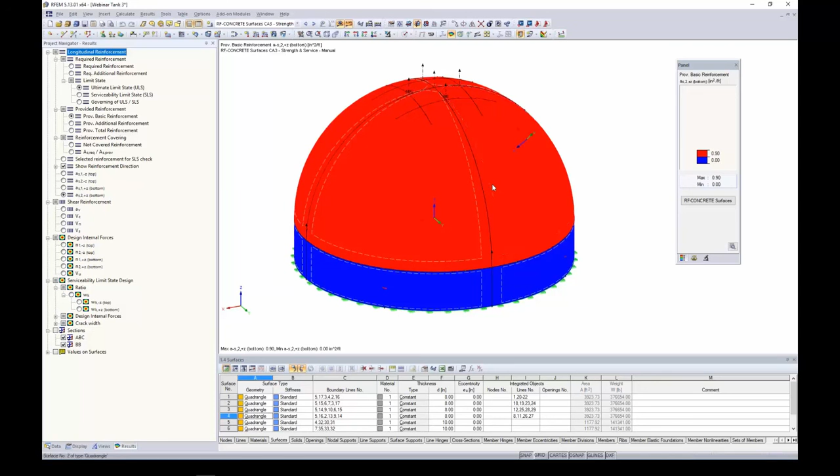But like I said, most beneficial is probably to jump to the graphics view. So for the graphics view, we want to take a look at, again, required reinforcement did not change here. The provided basic reinforcement, remember I've only provided that for my dome surface elements here, 0.9 inches squared per foot. The walls are 0. Instead, for the walls, I define that as provided additional reinforcement. Here's my 1.9 inches squared at the top of the wall and 1.5 inches squared at the bottom.

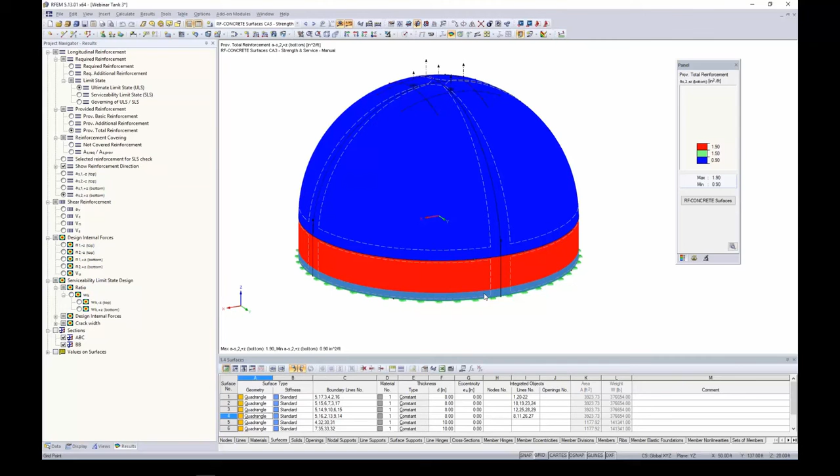We can view everything added together for provided reinforcement. 0.9 inches squared per foot, 1.9 inches squared per foot, and 1.5 inches squared per foot. Now when we take a look at our not covered reinforcement, it looks like everything is 0. So based on the applied reinforcement that I put into the program, we are meeting what the required reinforcement is.

So one thing I also wanted to mention quickly is our serviceability design. We haven't touched on that yet. So if we jump to the serviceability table, you'll notice here is my crack width. Here's my existing value based on the applied loads. Here's my limiting value. Remember, we set this as 0.012, and ultimately we get a ratio for our serviceability design. Gergely-Lutz equation is listed here, and all the information necessary for that.

We can also view our serviceability information graphically. For example, here's our serviceability tree. We can view the ratio for cracking back in RFEM. So the last and final thing I want to touch on is deflection. So going back to our working model here, we want to take a look at the add-on module, RF-CONCRETE Surfaces, and I'm once again going to go to File, Copy Case. We will call this one Deflection.

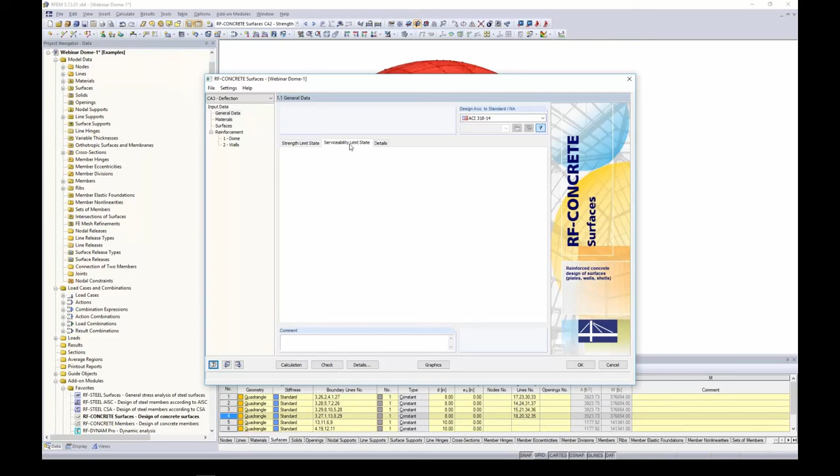I click OK. Now I've made a copy of this case, so everything has already been defined for my reinforcement. I don't need to adjust anything. The only thing I want to show you is under serviceability limit state, we have two methods of check, analytical, nonlinear. Now nonlinear is for the module extension RF-CONCRETE NL. We won't be getting into that today. But rather, when I go into the details here, we're already designing our serviceability for cracks, but we have another option here called deflection with RF-CONCRETE Deflect.

Now again, this is a module extension. When I click this option, the program throws up a warning saying we're not going to adjust the required reinforcement based on deflection design or deformation checks. That's fine. Basically, all we're doing is checking the deflections but not adjusting any reinforcement.

Now, long-term deflection with considerations to creep and shrinkage can be considered here. Now, this all just comes from the ACI. The ACI requires creep and shrinkage to be considered for uncertainties in temperature, humidity, curing conditions, and so forth. We can put in here the duration of our load.

Now, in turn, this duration comes from table 24.2.4.1.3. It affects our multiplier for long-term deflection. That multiplier will be multiplied by the immediate deflection, and that's what we'll be checking within this add-on module.

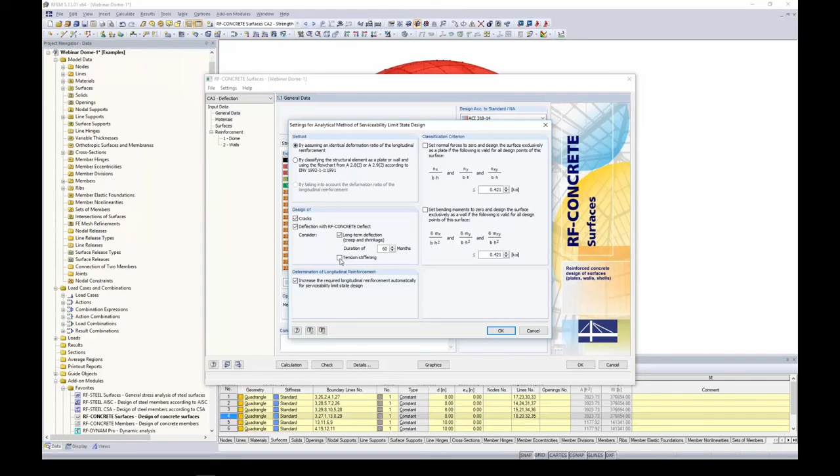Tension stiffening, with this check, this is just telling us that the concrete, in addition to the reinforcement, will contribute to the resistance of the internal tension forces. If I were to uncheck this, we're assuming that only the reinforcement will contribute to the resistance of those tension forces. So we will leave this checked for today.

So I click OK. Now the only thing that's changed is under my Surfaces tab, we now have an additional tab here for deformation analysis. So we've already discussed crack widths, but right next to it is deformation analysis. Now we have some limiting deflection ratios here.

So you can see here that we have either the minimum boundary line, the maximum boundary line, or we can select some type of user-defined relative distance. The default is L over 250, but you can override these as you see fit. Now, something that's useful is to launch this little info button. This tells you exactly what it means by minimum boundary line, maximum boundary line.

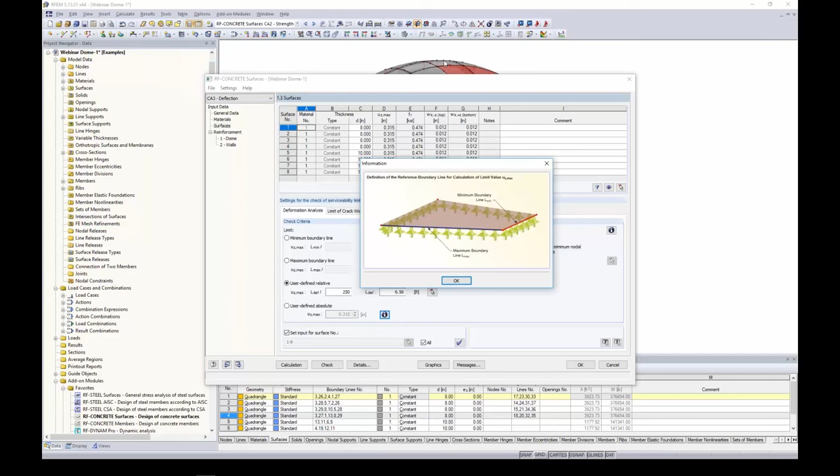Now, for today, we kind of have these odd surfaces, especially for our dome, where I broke apart some of the lines. So in my opinion, it's not ideal to use these today, but rather I'm just going to use this fourth option, and I'm going to say I want no deflection greater than 1 inch.

So the next question is to determine the deflection that we're checking. Is this based on the undeformed system or the deformed system? This is simply absolute versus relative deflection. So the undeformed system is going to be absolute. It's going to be measured from the undeformed structure to the deformed structure.

The second option here is maybe explained a little bit better in this picture. You'll notice that the deflection is simply measured from our deflected shape from corner point to corner point. The first option here is absolute deflection. For today, we'll utilize the undeformed system. So everything else remains unchanged. Remember, my reinforcement has already been defined, and I'm ready to run my calculation with deflection considerations.

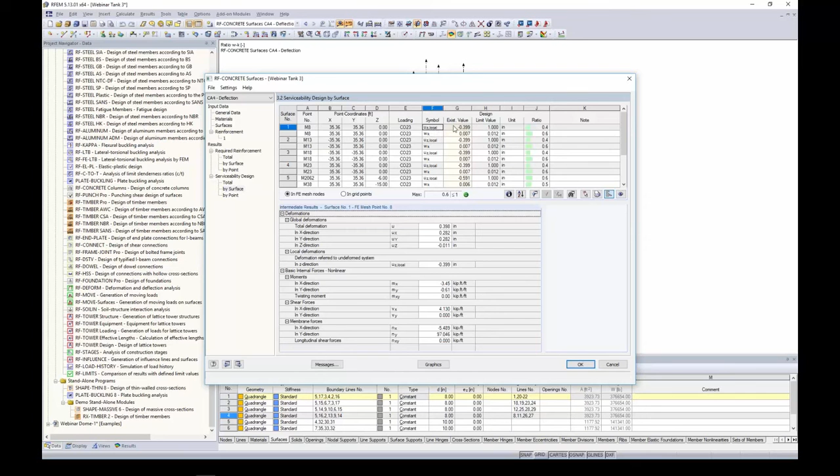So for the last time today, jumping to my saved results, I want to take a look at my RF-CONCRETE Surfaces module. The only difference we're going to see here is under serviceability design. We no longer just have the crack width considerations, but here is my deflection checks. My existing values are listed for each surface, and again, I can take a look at exactly where these fall within the structure in the background, if I pull this down a little bit, as well as the limiting design values. Remember, we just set this to 1 inch, and ultimately we get a deflection ratio.

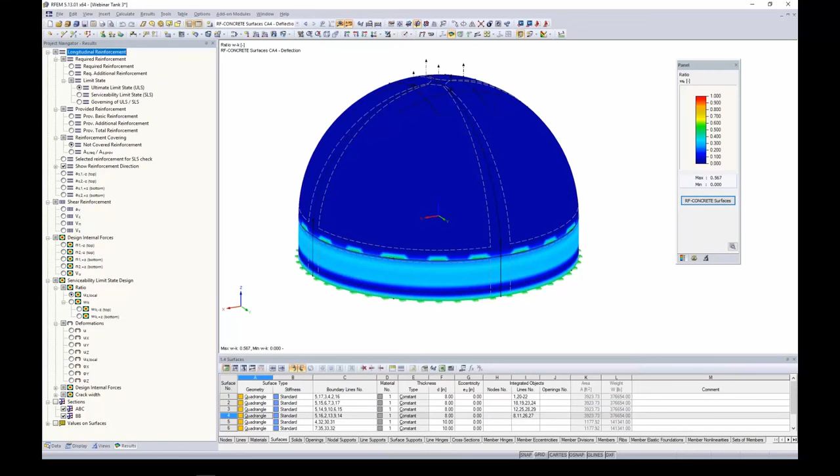We can view all of this graphically as well under the serviceability. Now we have the option to view the deflection ratios back in RFEM. So that's really all that I wanted to touch on in regards to deflection as well. Okay, so going back to the PowerPoint, that essentially wraps up our webinar for today. Now, I know that was a lot of information, as it always is, for the last hour.